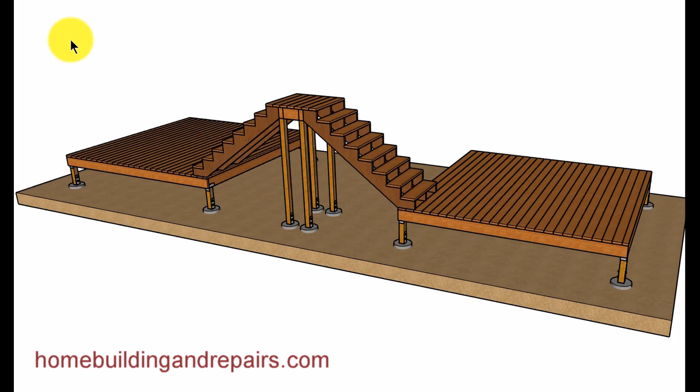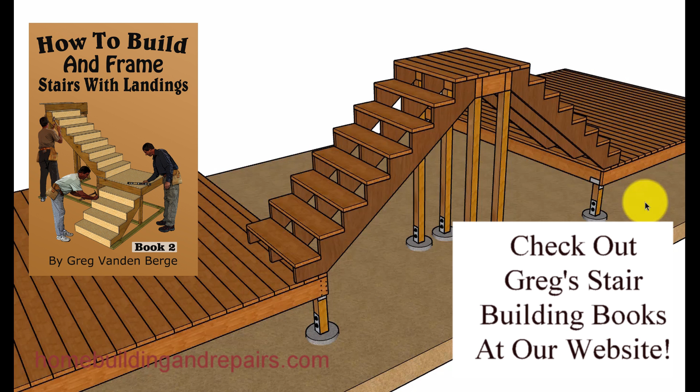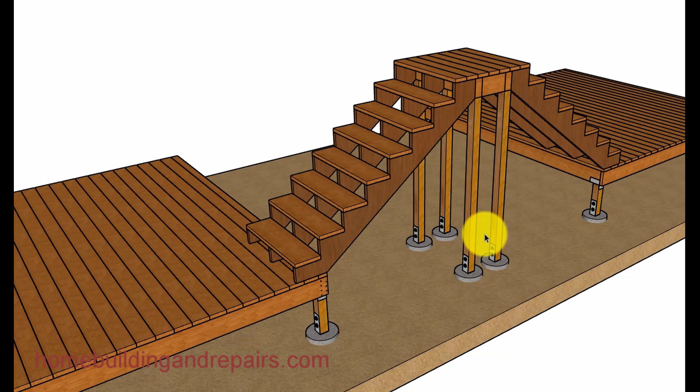Here's another question that was sent to me. The individual wanted to know how they could connect a deck to a landing below, a basketball court, I believe, and wanted to create an area that they could walk under. So this one right here wouldn't be the one that they would be using, but I thought I would throw this out there and give you a few ideas for different ways you could build this type of

setup. Stair stringers sitting on top of the deck, connecting to a 4x8 beam. We've got a few joists in here and the post. Now, if this is a little wobbly, you're going to need to brace these posts, maybe connect a 2x4 to something up here, and I'll try and put a link up in the top here somewhere where you can check out how I did it for a deck, give you an idea what you might need to do.

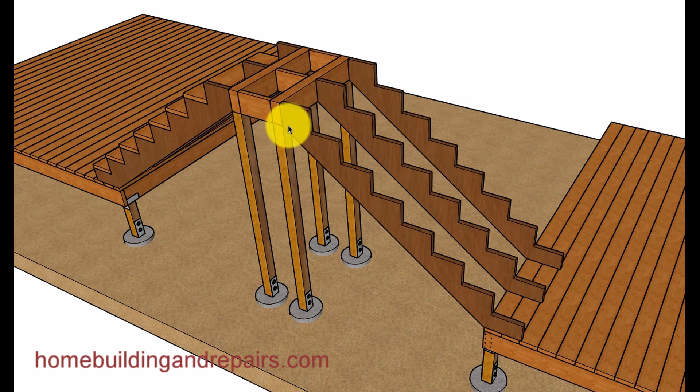Keep in mind, if you're looking for a little more strength and you got the room, a wider stairway is going to provide you with a little more strength. If you made this 4 or 5 feet wide, you'd really be able to brace this off, create a nice brace system. And the wider the stairway itself, the stronger it's going to be to prevent it from going sideways.

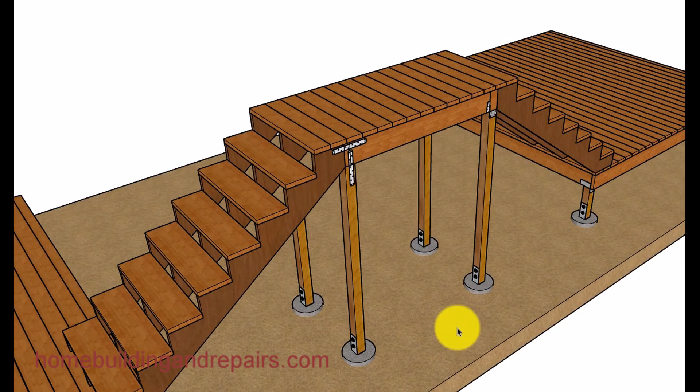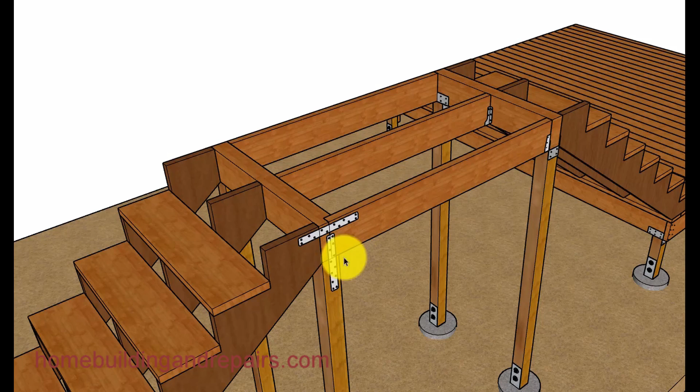This one here, I made the top a little longer. And of course, you can see where you could walk underneath it. Planking, 2x6 decking. And I'm giving you 2 different examples on how you can connect this. Here we have some joist hangers, and then we have an inverted hanger here supporting the joist, and a couple of straps here. And this one here, the joist is actually notched into the beam.

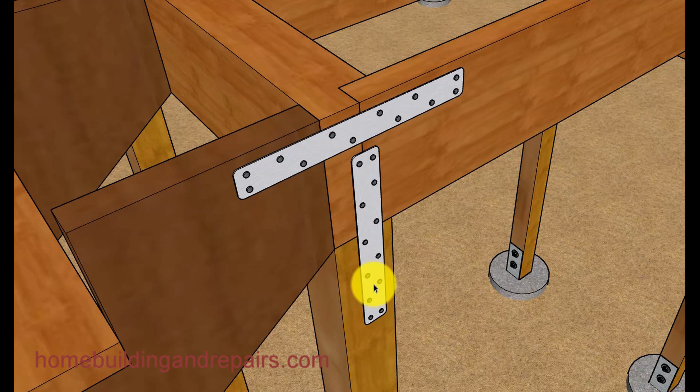And keep in mind that the beams require a minimum of 1.5 inches most of the time. Same thing with the joist. If you notch this in 1.5 inches, and you're still going to have 2 inches left on the beam plus this, I think that would work. Strap here, this would connect the post to the joist and the beam. A horizontal strap would tie this together, the stringer, the beam, and the joist. Give you an idea what the notch would look like.

And then over here we have the inverted hanger with a post cap, and you can see when you do something like this, you're probably going to have to drill some holes through the metal to get all this to work out. These hangers, when we start stacking them on top of each other, can kind of be a nightmare. But either way, this is a pretty good connection. This is probably a connection that an engineer would want you to have. Put the joist in, and there we go, another view of it there.

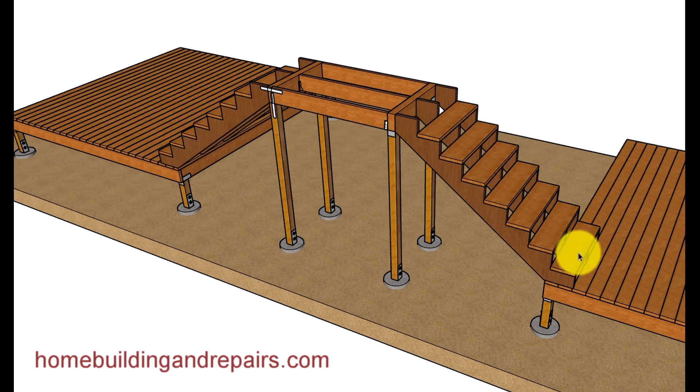Now, this is more along the lines of what the individual was looking for. I believe they were going to use 4x4 posts and have them next to everything. And this would be a great idea. This will create a strong handrail here. If we put the 4x4s back underneath everything like we did in the previous example, our handrails are not going to be as strong, or they're going to be difficult to build. This way right here provides you with a nice way to create a strong handrail. And I like to see the post underneath everything supporting it, but again, we're choosing here between the handrail strength and the support of the landing.

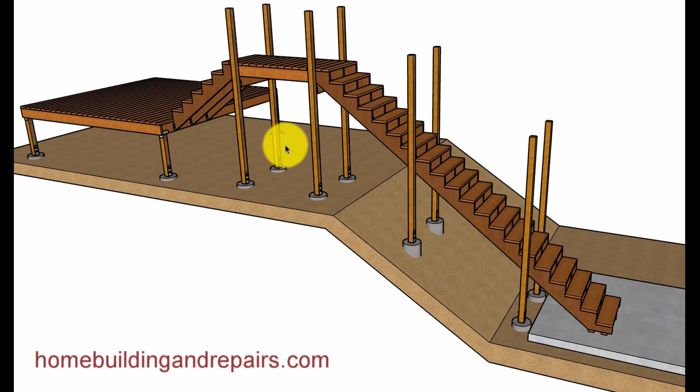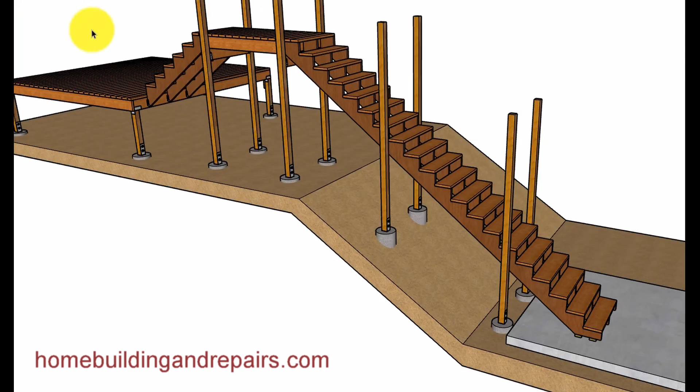And again, you might need to actually put 2 4x4s. One 4x4 goes all the way up for the handrail, and then set another 4x4 next to it that would support the beam. And I could always provide you with an example of that if you needed it in another video.

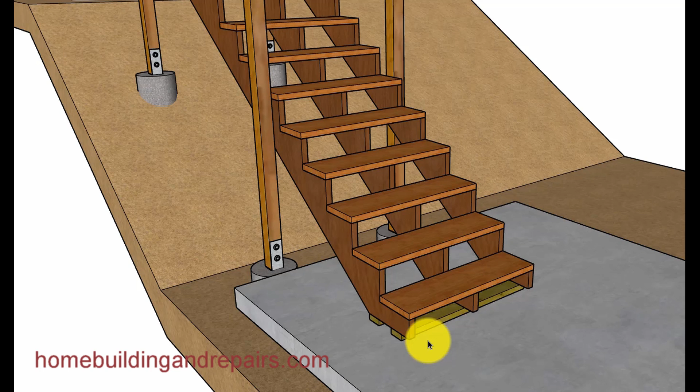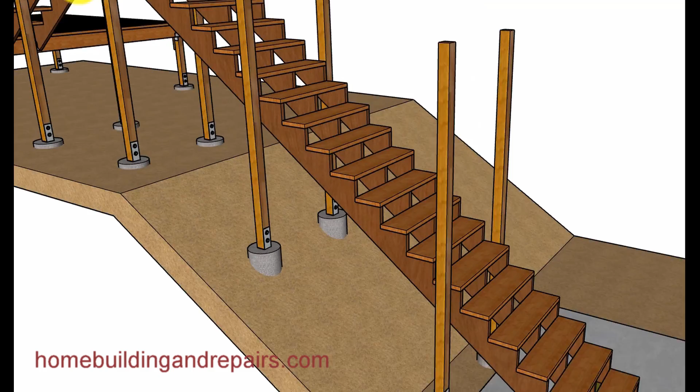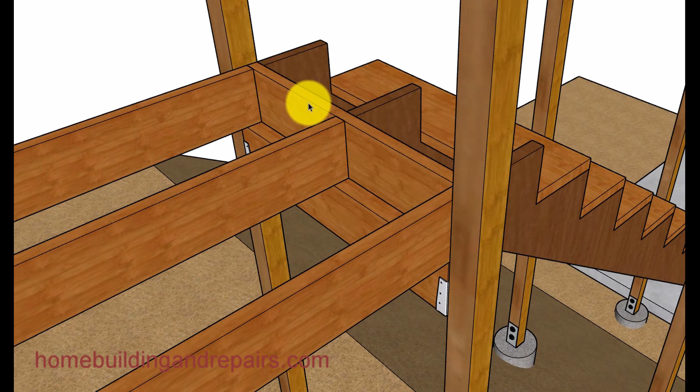Here the post can attach to the stringers and obviously provide additional support for the stringers. So here we have the same length of the landing. The only difference here is the posts are going to be on the outside. And of course it'll have a rim joist. The joist will be sitting on top of the beams. They will not be using hangers for these. We can see here they're sitting on top, and the rim joist is sitting on top. And then, of course, we're using an inverted hanger on each side for the post support.

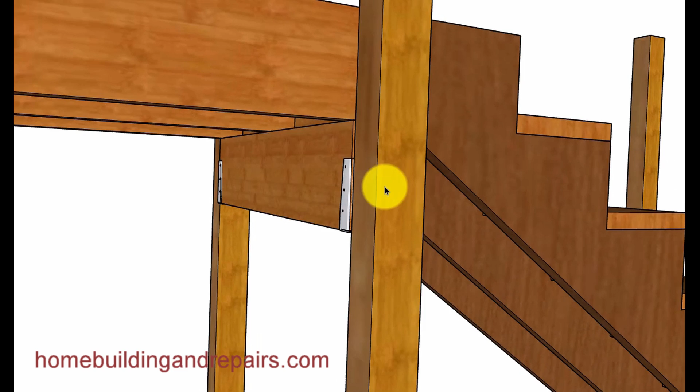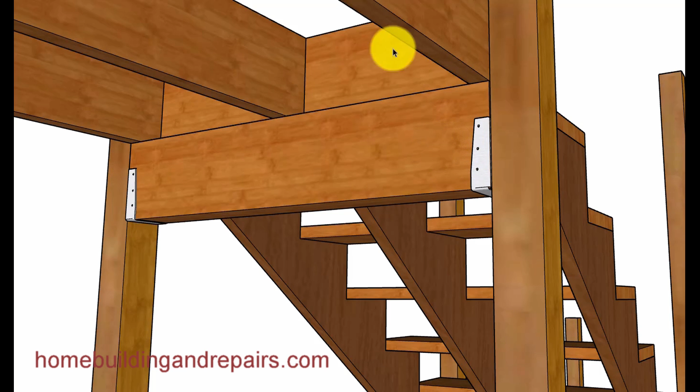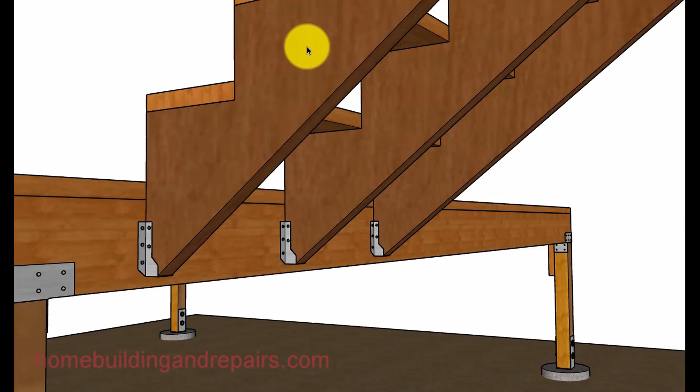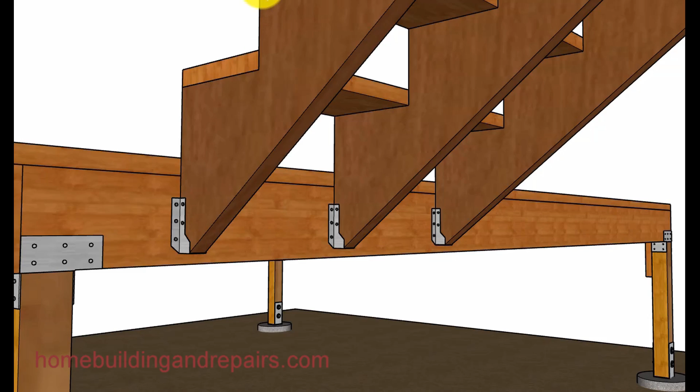Now, the individual also was interested in this type of a connection, so I figured I would draw it out. The stringers come down and they would sit inside of joist hangers. And then, of course, it would be even with here. Instead of setting the stringers on top of the deck, you might want to have this as a design idea instead of having it sit on top and encroaching into your space also.

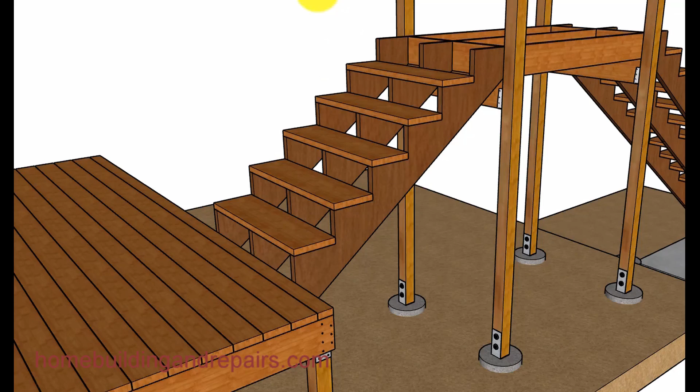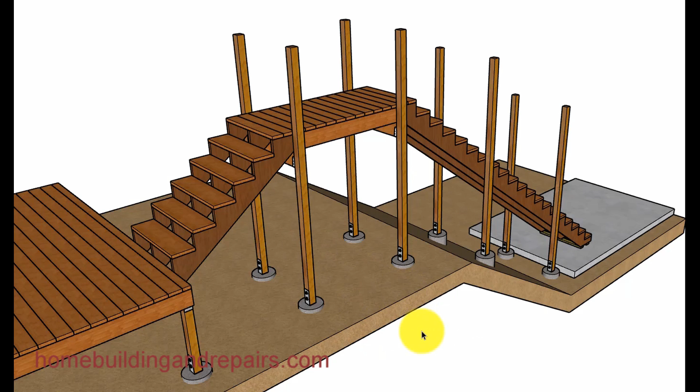And that is it for the video. If you build it tall enough, someone will be able to walk through here. And again, don't forget, these design ideas are just ideas. They might not work for every project, and some structural engineering might be required also.